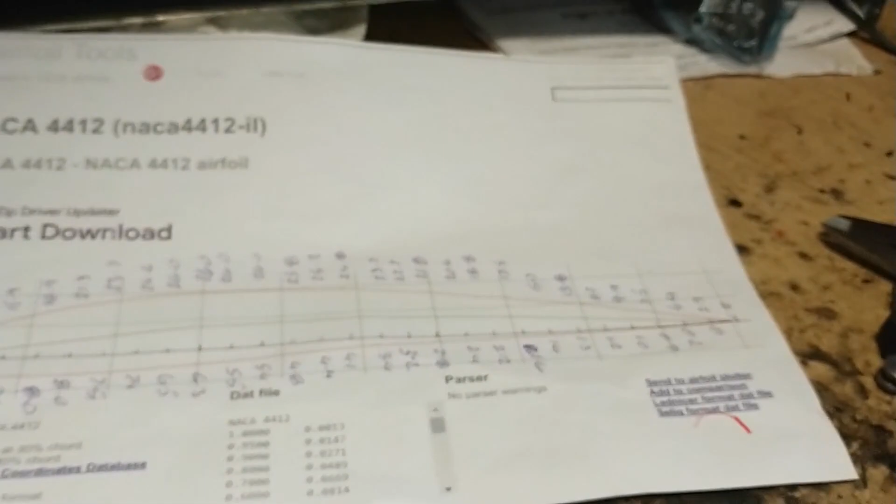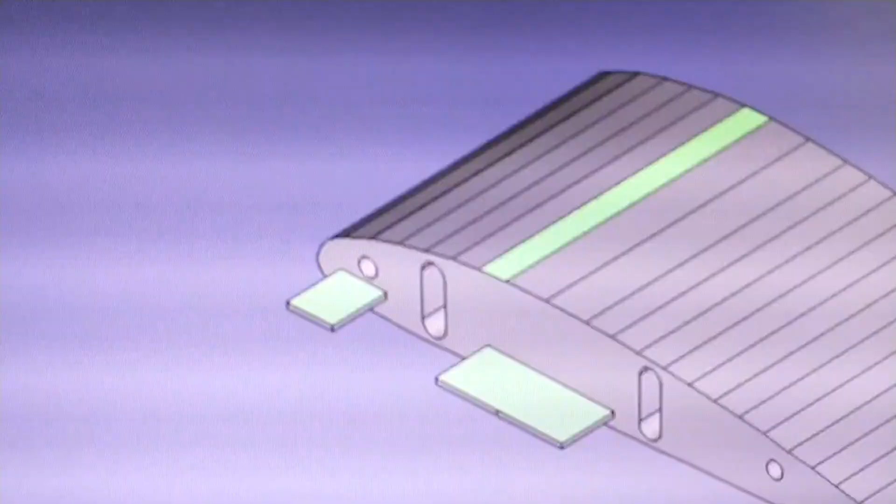So it's a printout from airfoiltools.com of this particular wing shape, which I'm told is the thing to use. I've transferred that onto my CAD program that I use, and I was also told that it works best with a 5-degree attack angle. So I've just printed these little plates on as well, which are on the midline. When it's printed, I can use those to set the 5 degrees up using a little angle meter.

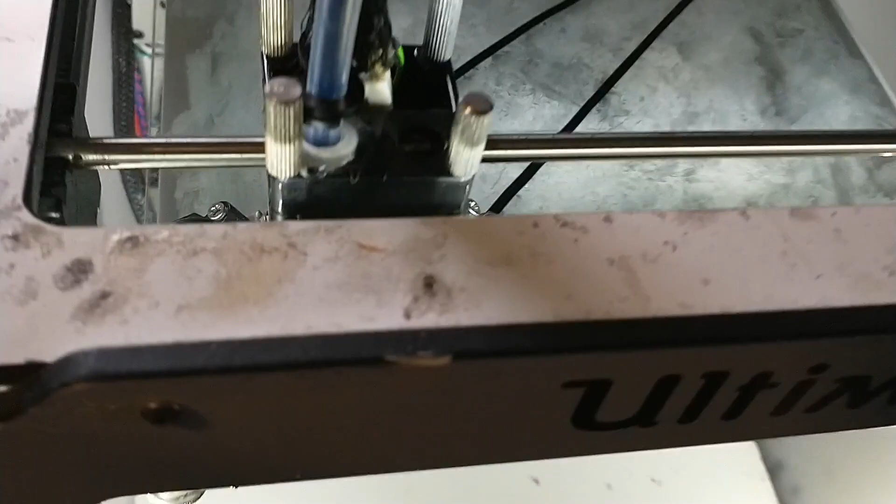And that's the printer just started on it. It's a 4.5 hour print time, so I don't think I'll video the whole print. Unless anyone's got a bad case of insomnia, maybe you could sit and watch it.

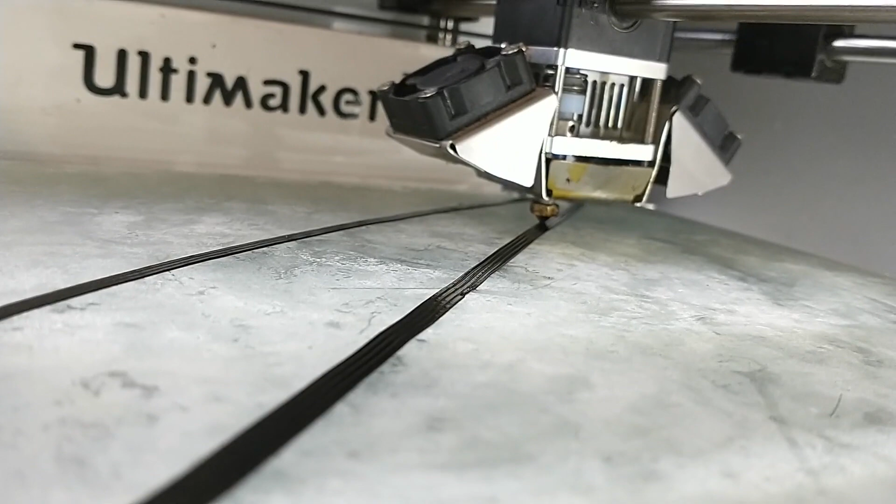Even better than counting sheep. Anyway, I should leave that going. Hopefully in a few hours I'll have a 100mm prototype wing to try on the car.

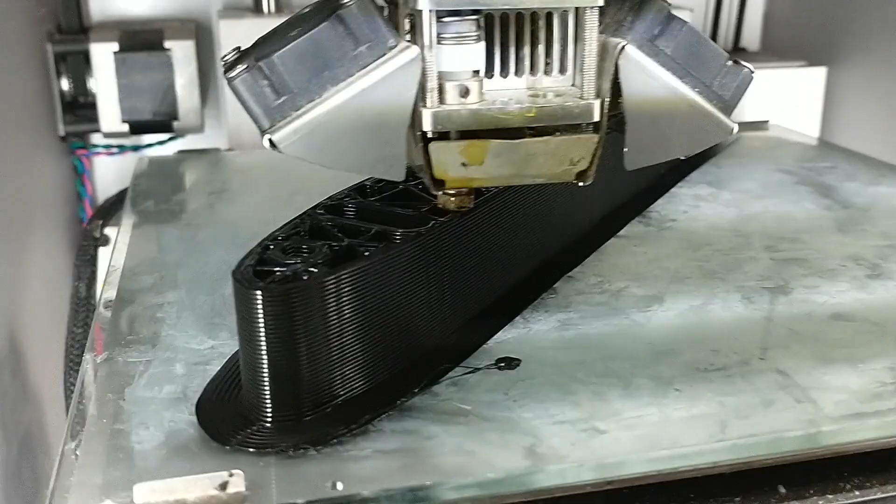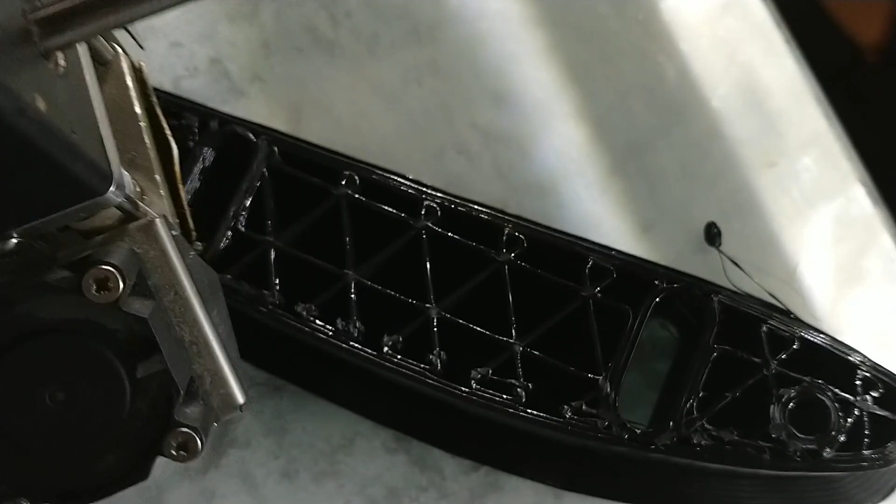Still printing away happily. You see the way I have it set up to print, this stuff is called infill, so it's not a solid thing. I have it set for 25% infill, but it infills with triangles, so the theory being it's basically triangulating the inside there, which should make it reasonably strong.

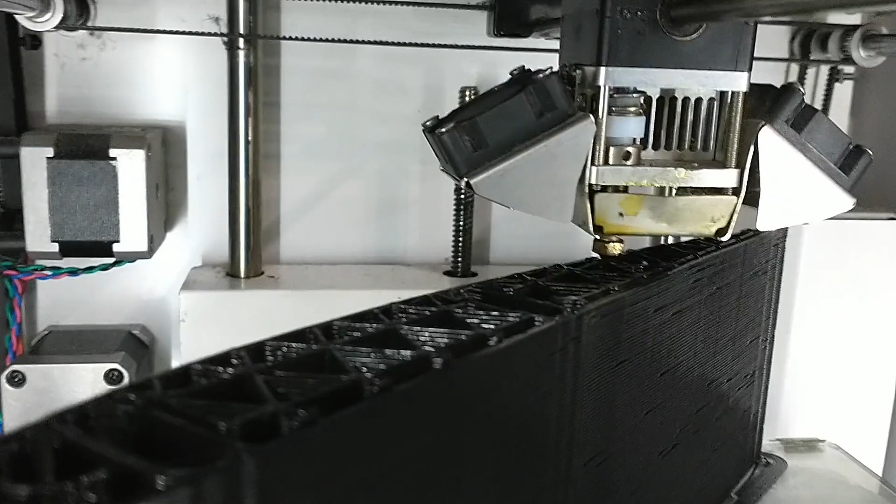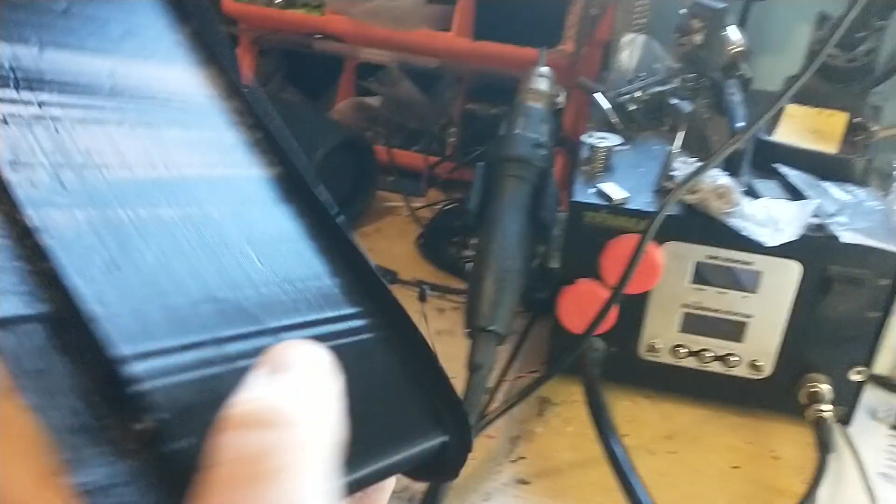So next morning, we've got - it's quite a different profile from the ones I've been trying to experiment with, but it should be much better. Hopefully I'll be able to get it on the car soon.

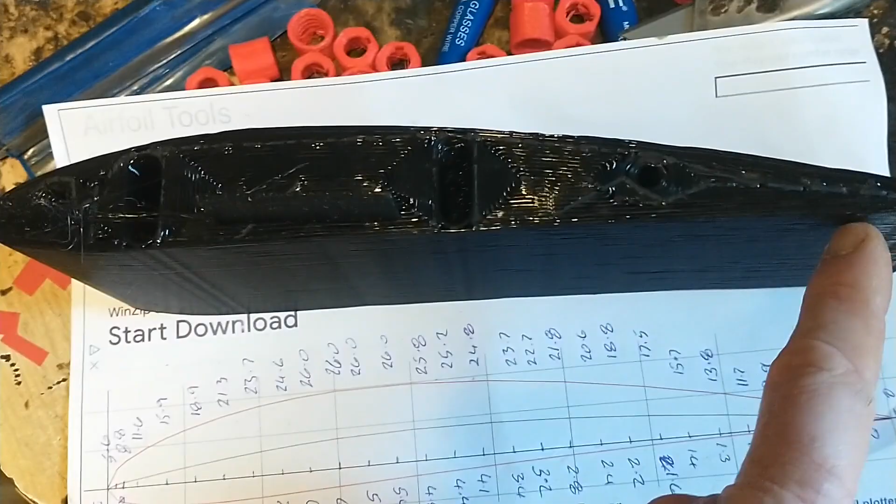So it's looking pretty well, much like the profile off the website. Maybe this bottom isn't quite right, but it's certainly close enough to test, and if it works best I'll probably just tweak things a tiny bit.

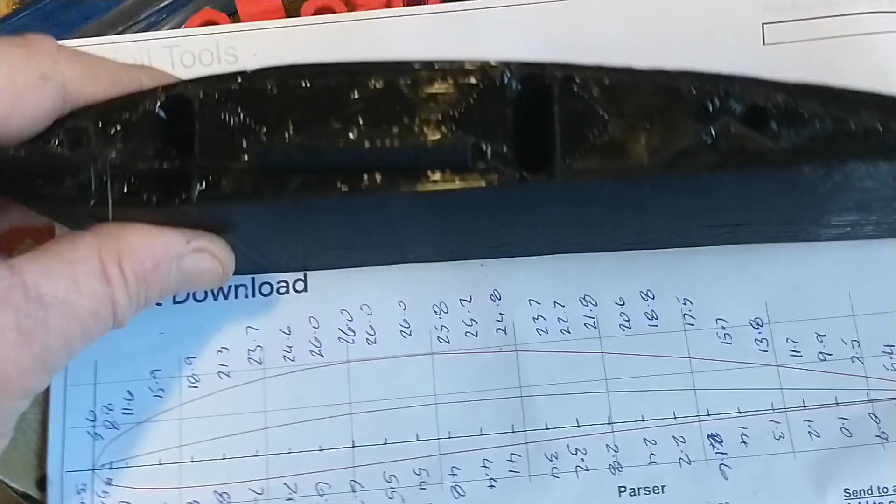It seems to me that this profile here is a little bit flatter on here, but we'll see what happens.

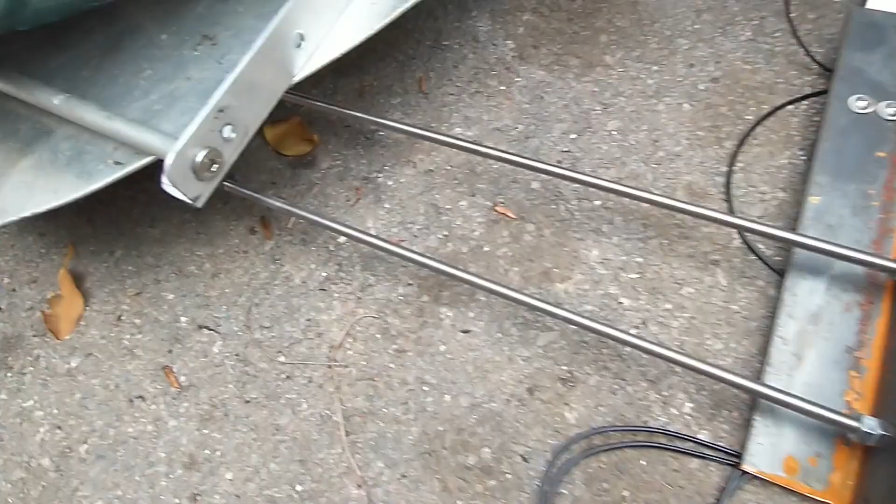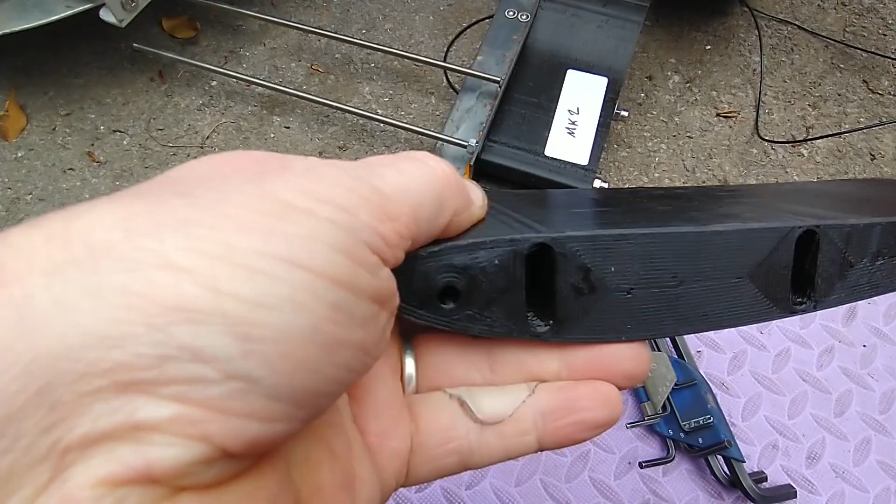So it's time to fit the test rig back on and fit the - I can't remember what it was now - 4412 was it, profile wing, and see what it does. Just double check that. That's close enough to 0 for me, and 5.8.

The highly professional test stuff is lashed back down to the car. I'll put the GoPro on. I've just put the GoPro on charge. I hope it lasts long enough because the charge is a bit low on it.

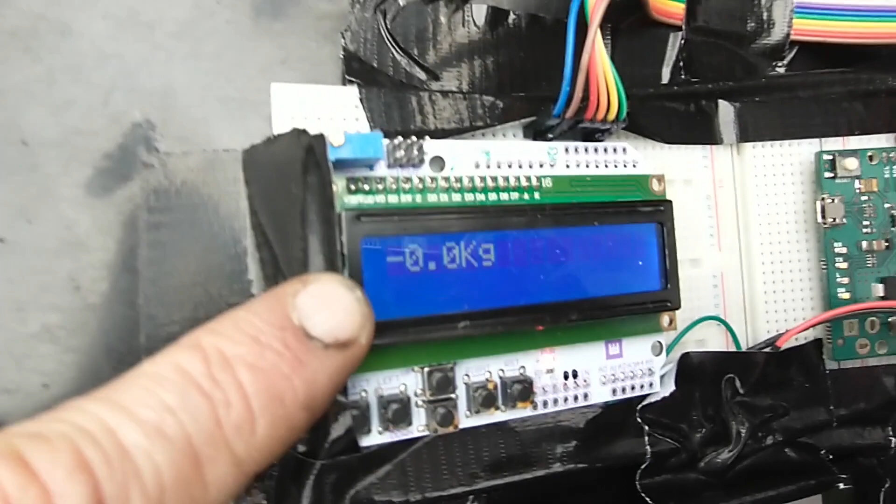If I mentioned as well, I've altered the program, so hopefully there's not such a delay on updating. I've sort of taken some of the damping out of the update rate, which I'm hoping doesn't mean it jumps around over bumps, but hopefully updates a bit quicker than it did before.

So the more observant of you may well have noticed that everything's now mounted in a different place from when it looked like I drove off a minute ago. I've had 2 runs out, and both times the video of the screen showing the downforce has been really poor. So I've called on my mate Brian from the Oak Swamp channel, and he's good enough to come out this morning and be videographer, so I need the passenger seat. So it's off to Brian.

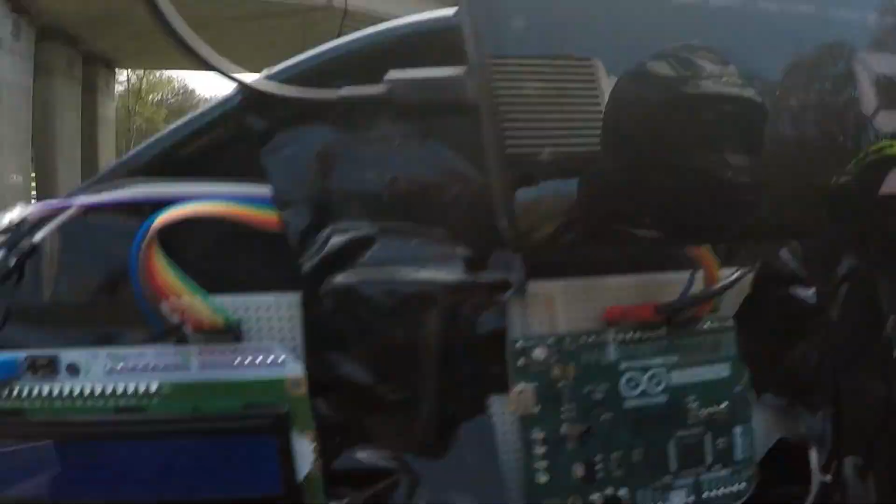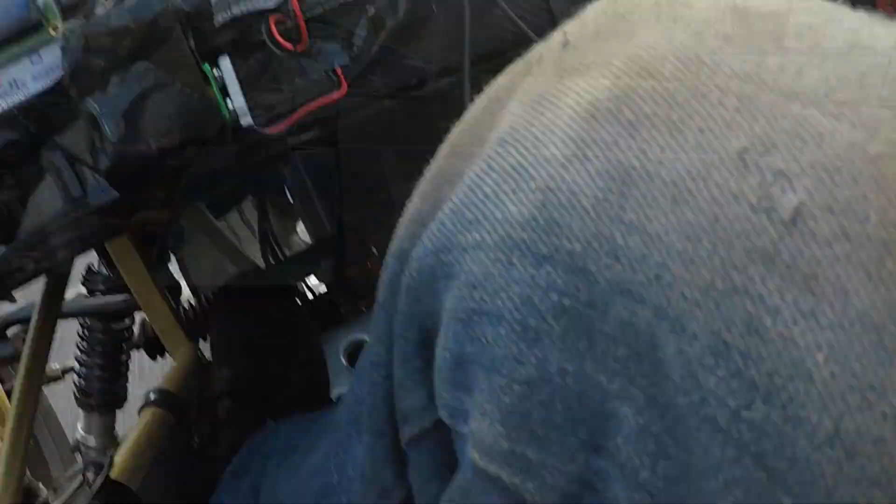Done with Mark III wing. So stop for coffee and give the videographer a rest and fit Mark IV wing. Because I knew I'd forget which is which, I put nice big labels on.

So once coffee's finished, we'll head back down the motorway and keep fingers crossed, because the circuitry's been a bit of a pain in the ass this morning, so hopefully it'll all be fine.

Hello. Car park would be good fun, wouldn't it? You'd go underneath that, wouldn't you? Maybe. We should drive under it, wave at me, you know, like that. Yeah, a good old loon around in there.

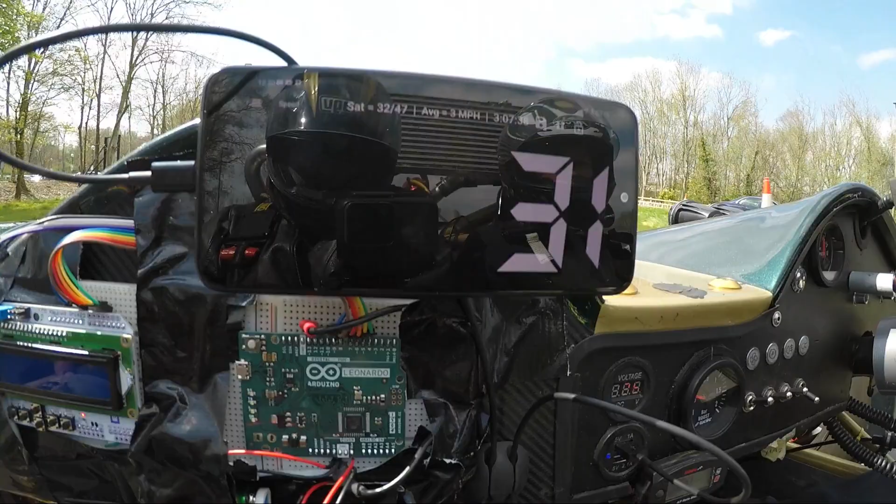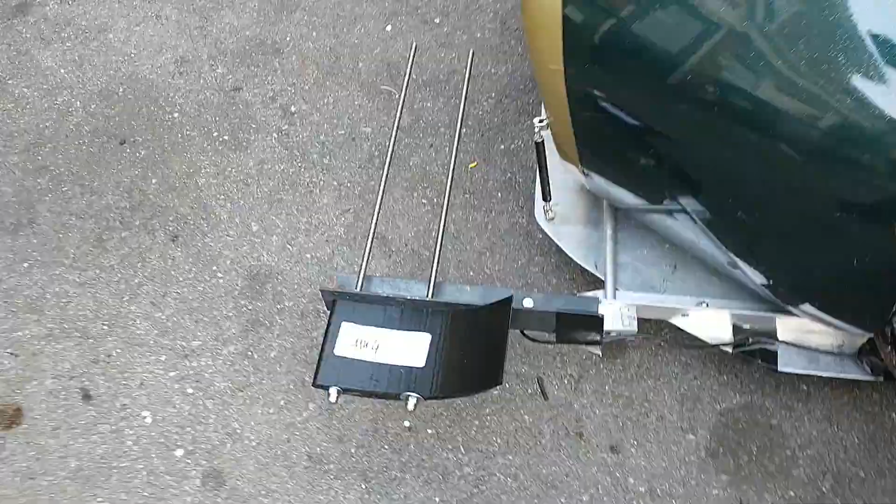So another day and yet another positioning of the camera and the record and the displays. The video in yesterday didn't really work out.

Two separate problems: the GoPro seemed to play up, and the battery went flat on the circuit display for the downforce. So I did get some info on that, which hopefully will be on the video, but not enough to get any proper results. Anyway, so it's a lovely day, a good excuse to go up on Portsdown Hill and have a burger for lunch, isn't it? So, fingers crossed, I can get some results this time.

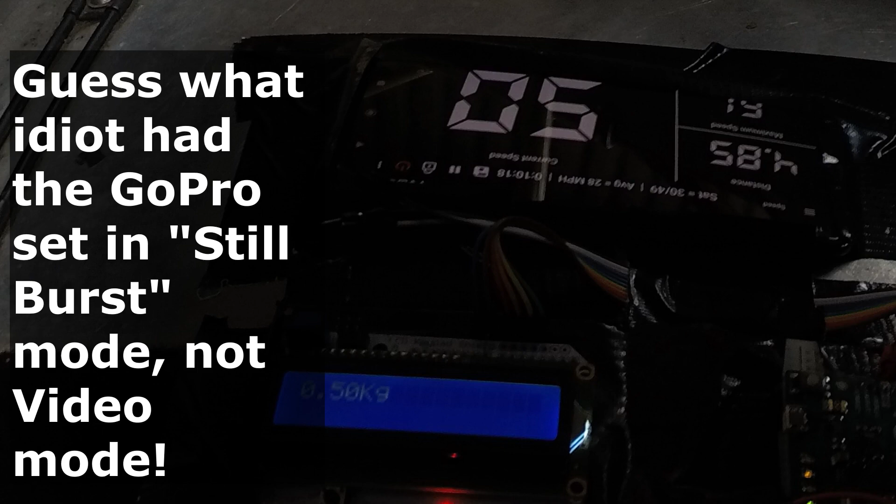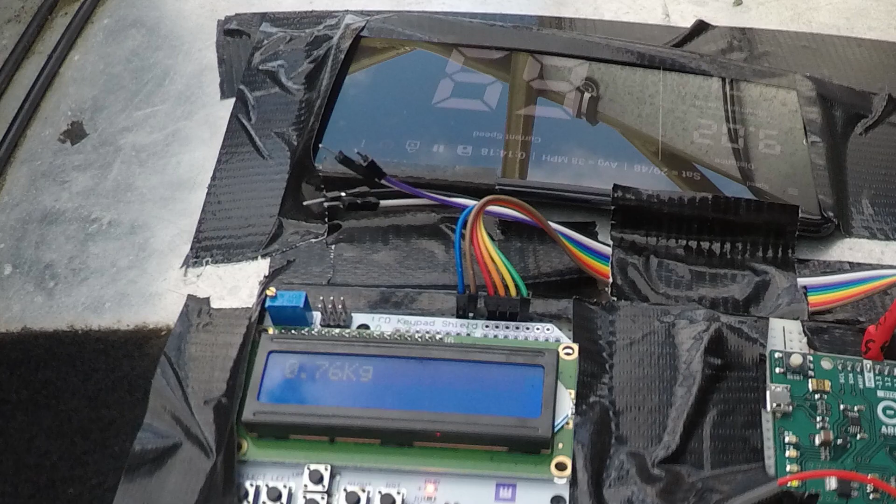Having a little pit stop for a coffee and a burger up on Portsdown Hill. It's not a bad view, is it, for a pit stop for lunch?

It looked to me like I was getting decent figures from the Mark IV wing. The interesting thing was, going along the motorway at 70, when I was up behind - not up the arse of a car, but about 20 metres behind a car - I could start seeing the downforce figures dropping off by about 25%. So I guess that was sort of the slipstream effect.